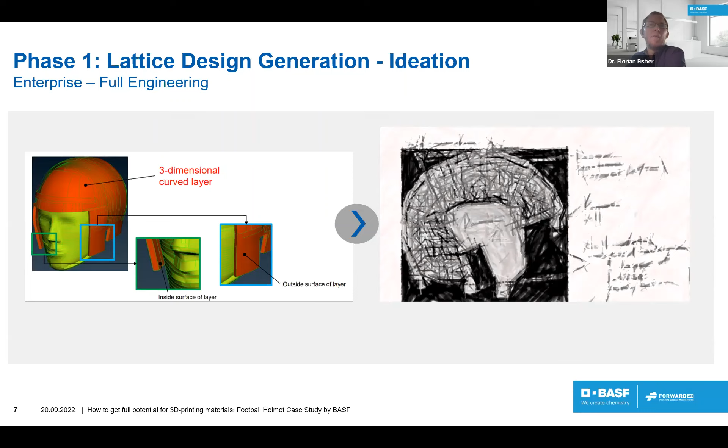And with this idea, we went forward, started to look into what kind of lattices could we use, what kind of unit cells can we use to have optimum performance. And I think this is something a lot of people became aware of over the last 3 years, but 3 years ago, this was really one of the first studies.

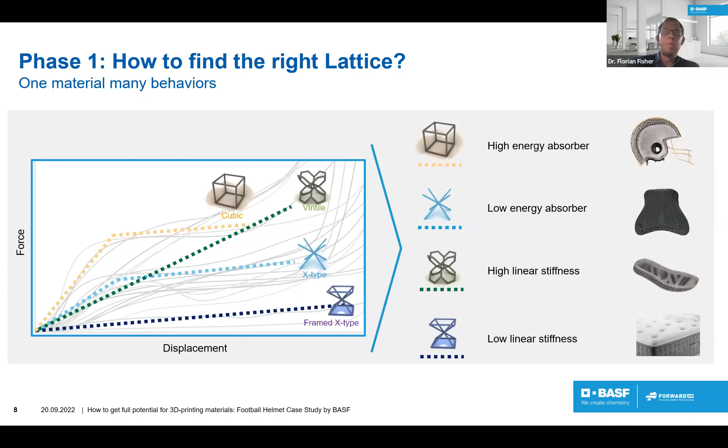And if you want to start with simulation, well, you first need a material model. And this was something we were working on already, especially for the flexible materials, with our BASF colleagues, who have more than 20 years of simulation experience and normally support all the injection molded materials for our customers with a material model so they can simulate those kinds of injection materials. And we wanted to include this part of BASF also into 3D printing.

And then those are transferred to our Ultrasim team and software, which is a software to generate material models out of this data. So we do fitting of this data, optimizing those data so that in the end we have a material model which can be used in typical FEA solvers like an Abaqus or an ANSYS solver, and implemented it then into the typical test the NFL is giving and providing for simulation.

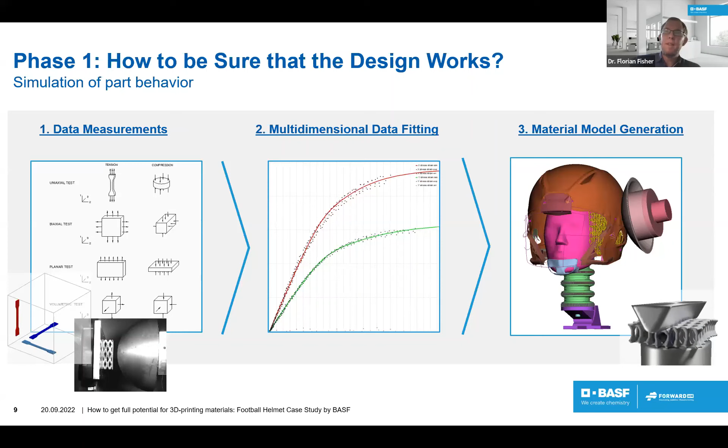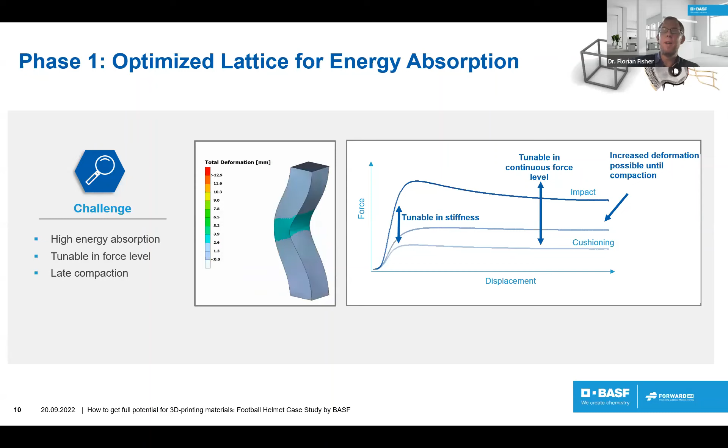And using those kinds of data and models, you can really go one slide further, Marius. You can see here, the challenge was to get a high energy absorption. We wanted to have it tunable in force levels. So depending on where you need it on the helmet, the force which has to be taken in during an impact has to be different, going from just the cushioning, what you feel, to a real impact absorption. And we wanted as late compaction as possible so that you have a huge deformation until the force is transferred to the head.

And using simulation on the single lattice beams, later going to a full unit cell, even later going to real parts of the helmets, we optimized the lattice further and further to fulfill the NFL requirements, always taking into account that we need the lowest weight possible in those kinds of structures. And this was all implemented into the helmet and the first prototype.

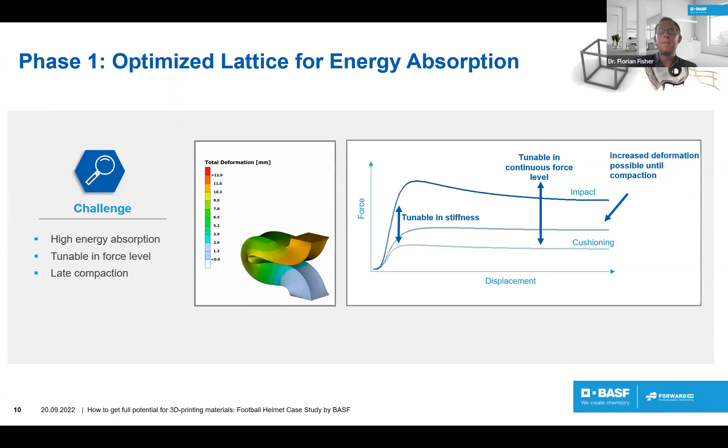And with this, we then in 2021 sent in the first model and had to wait for quite some time to get feedback, because it was quite interesting. The NFL took some time. They measured all the helmets which were sent in and so on. And in the end, they set the highest score which was supposed to be passed for the winner, and none of the applicants passed this really high score the NFL set out as a goal.

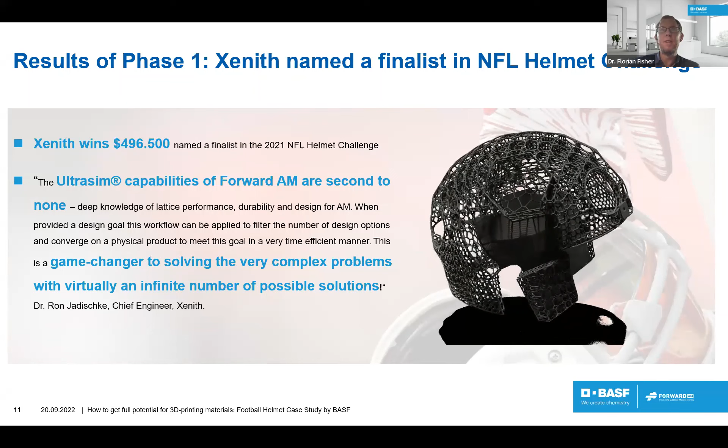And therefore, the NFL decided to name 3 finalists, and Xenith was one of them, and provide all of those finalists with new funding so they could go into the commercialization phase. And so Xenith did win almost $500,000 at this time. And especially proud we have been of the quote Xenith gave us, which you see here: Ultrasim capabilities for AM are second to none. It's a game changer to solving very complex problems virtually with an infinite number of possible solutions.

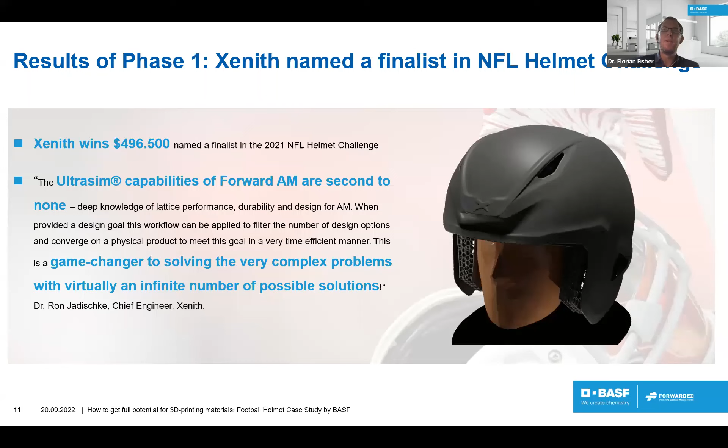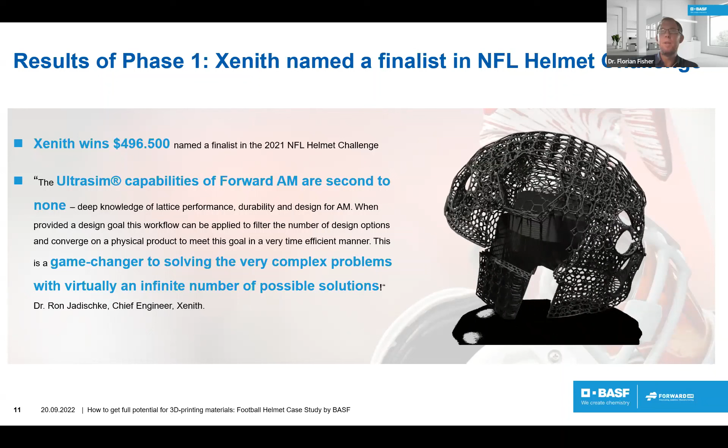And I think this kind of story we played several times with several of our customers, always when it is needed to really fast iterate and find a perfect solution for either a norm or a performance, always taking into account that you have a low weight. Yeah, I hope this gave you a little bit of an insight into how we can use our simulation capabilities to really speed up a project and bring it to the highest performance.

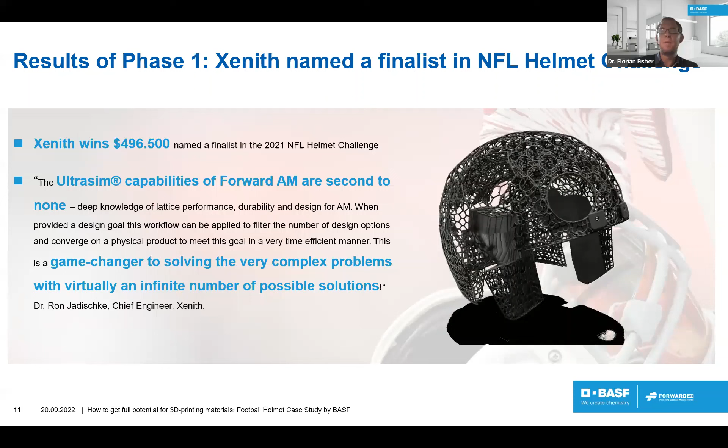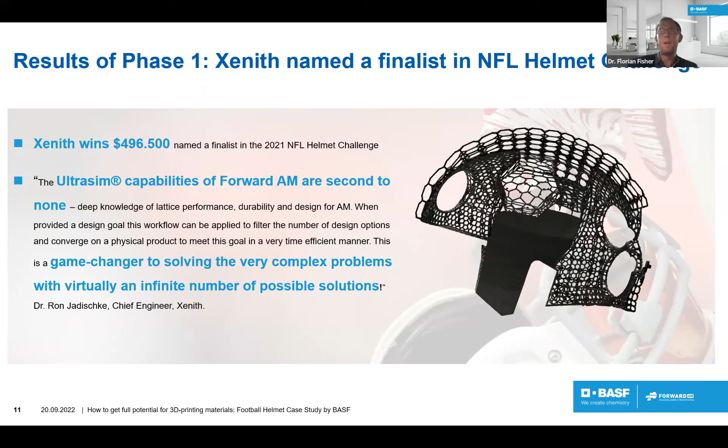And during this project, which took 3 years, we developed a lot of methods which are now more or less ready to use, really automated, so we can go really fast from an input requirement to the final lattice which is needed for a specific application, often in protective gear, but it can also be in footwear, bike seats, and so on. And with this, we finalized the first phase, and I hand back to Marius, who is working a lot on the second phase with Xenith.

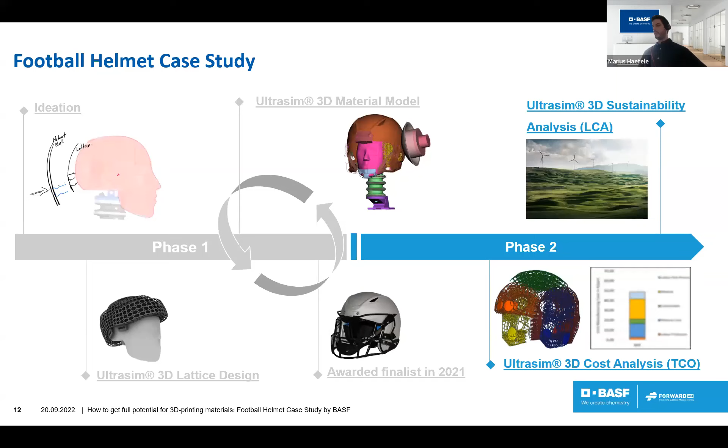Thank you very much. So yes, with the technical solution that we have just seen, we start into the second phase that is more looking at the commercialization, meaning we have to understand the application from a cost perspective, but also from an environmental perspective.

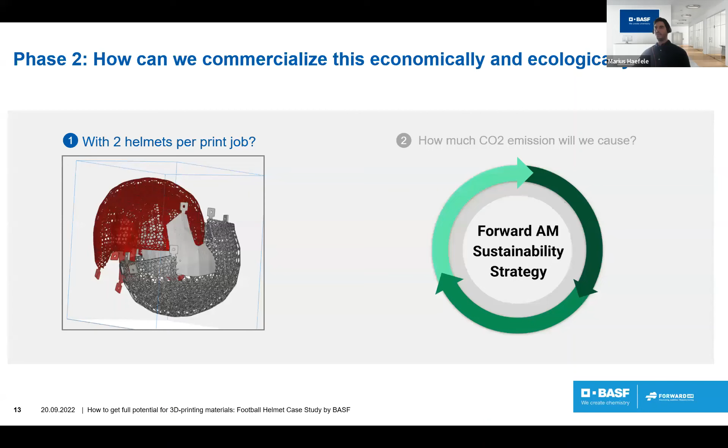And the overall idea here in general was to better understand what are the costs of parts and do we meet the target costs. And you saw the finalized helmet just now, and I put it here on the left side as well. The question was if you actually have a bulky helmet like you see here, and you put it into an HP machine and you have a limited space inside the build unit, and you're trying to nest it, no matter how you turn it, no matter how you rotate it, the maximum number of parts you can nest within one build job is 2. So we start with 2 helmets per job.

And if you now look into the cost per part and you look into what an overall print job of an HP machine costs, you quickly understand that you have a lot of material that is not used. You have a lot of printing time that is basically used only for 2 parts. So the overall costs are simply too high. It's too expensive in this current version.

Now, we also understand what are the target costs, because those are typically given in such a project in the very beginning. So the customer has some kind of idea of where they want to go. And looking at where we're starting here with 2 helmets, we quickly understood that we have to actually do some more ideation phases to drive down the costs in order to meet the target at around 9 helmets per job and around 80%.

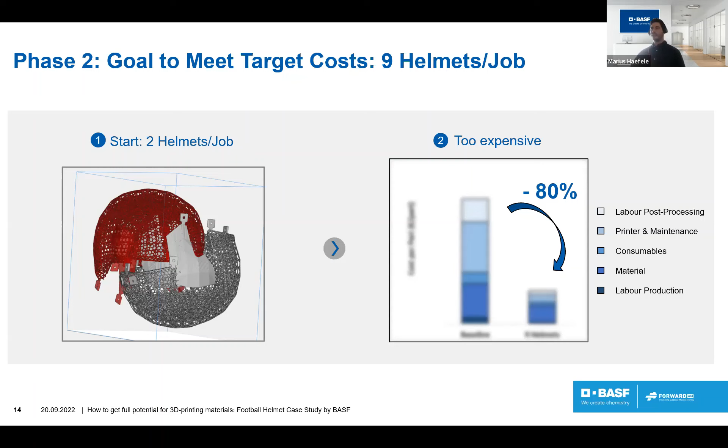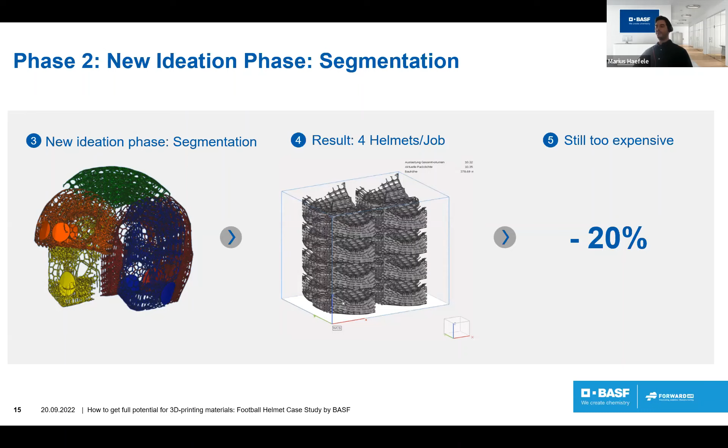This drives down the machine costs, and you use more of the overall material, driving down the material cost per part. So you see with the new segmentation, instead of 2 helmets per job, we now have 4 helmets per job. This essentially reduces the overall cost by 20%. But looking at the target cost, we see that we're still too expensive, so we have to continue working on it.

Now, because this is a project that is not going into serious production today or tomorrow, we also have to take into account the future market developments. So this means we have to look at what is the impact of these market developments on the cost per part within the next 3 years. And there are technical assumptions to take into account, and there are business assumptions to take into account.

On the technical side, you will have somewhat of a higher refresh rate for the TPU01 that essentially reduces the material cost. You have more efficient printing modes that will be able to print faster, that don't take as much printing time, which means that you can drive down the machine costs of the overall parts. On the business side, of course, in future with higher production volumes, you will also have lower prices for material, as well as lower prices of hardware.

And taking these assumptions into account, you have overall, together with the segmentation, a cost reduction of around 50%, which, again, looking at the target cost, is still too expensive, which means that we had to go into a second ideation phase. And this is what I call the armadillo solution.

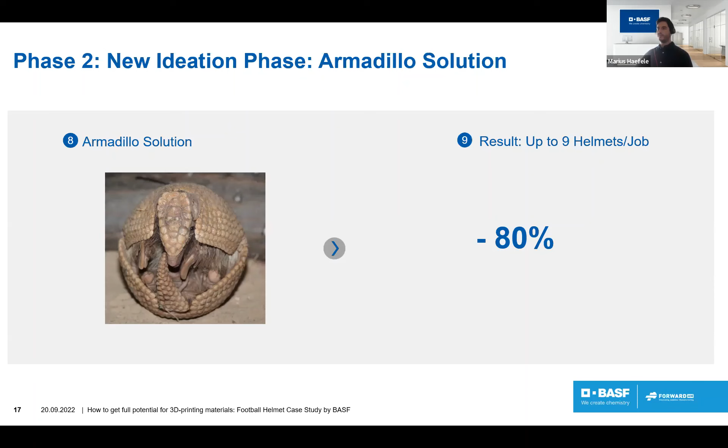Now, going away from the cost perspective, we also want to look at the sustainability perspective.

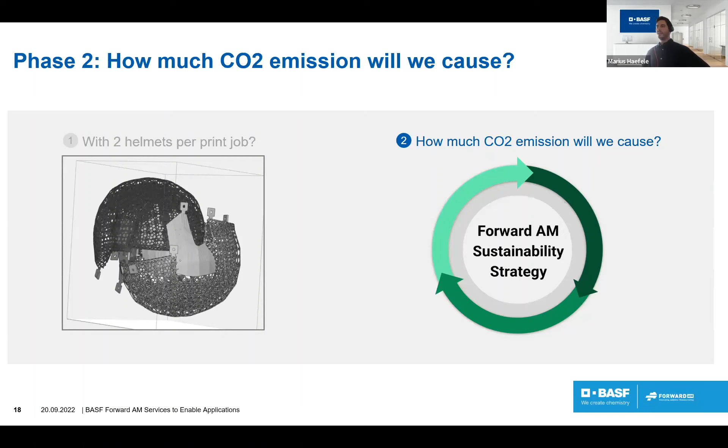And from a sustainability point of view, it's very important to understand, when developing and producing a part like this, any kind of 3D printing application, what is the CO2 emission that we will cause. And this is something that is very close to our hearts. This is something that we within BASF Forward continuously drive forward, to really understand the full CO2 impact, but also the overall environmental impact of our materials and the parts on the environment.

And it's a quite lengthy process, because in the very beginning, first of all, you have to measure. You have to measure to provide transparency and information. You have to understand what are the different inputs in order to produce a material, what is the machinery, what is the electricity, what are consumables, all the different raw materials. And you have to put this together to run life cycle analysis to understand what is the overall footprint.

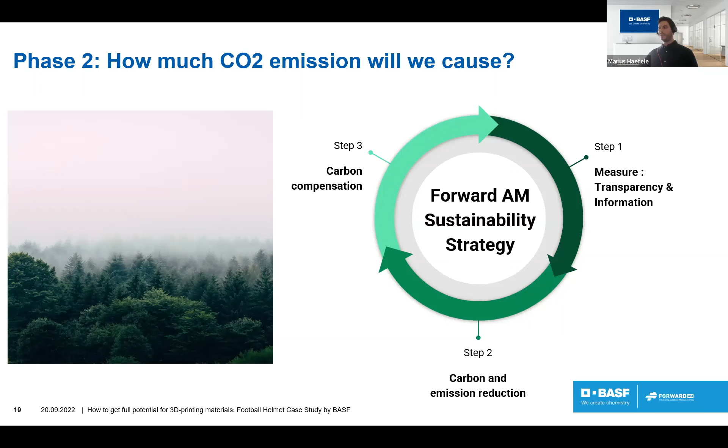In the second step, now you understand where the carbon footprint is, and you can actually reduce it or deploy measures in order to bring it down. And in the third step, it's the carbon compensation. So there will always be some leftover that can be compensated by carbon compensation projects or activities in order to help the environment. And this is something where we are going next, also with Zenith as a next step.

You have, of course, a lot of energy going in there. You have steel for the machinery. You have waste that is being produced. So you check really for all the inputs and the outputs. You look at the post-processing, meaning you have depowdering, blasting material. You have maybe some kind of vapor smoothing, solvent. You have a coating, and then you typically have a use phase. And in the end, the part has to be treated.

So either it can be completely mechanically recycled, or it has to be incinerated, or in worst case, it's going to be landfilled. And this is representing a very generic life cycle assessment. This is something that we do internally, and want to also do more and more externally to provide this kind of service and more transparency about the carbon footprint and the overall environmental impact.

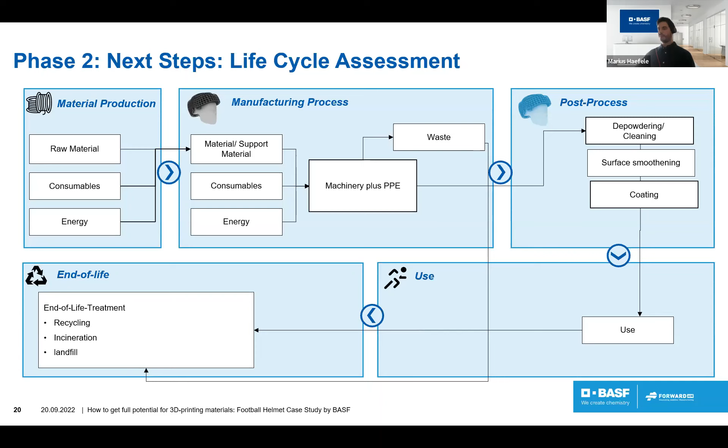So summing up, we started in the very beginning with why it is important to develop these protective gears. We presented that all the way back in the 1890s, football players did not use any kind of helmets, any kind of protective gear. We started with Joseph Reeves in 1893, who first introduced the helmet by asking his shoemaker after a severe injury. And we went all the way to the 1950s with this hard plastic helmet, going to the complete evolution of the helmets.

And we showed you the different lattice designs, where we developed a new lattice that really absorbs the energy that is laid out for the performance, together with guaranteeing that the design works with the material data and model, and also on the commercial side with the cost analysis, and in future also with the sustainability analysis, developing the next generation of football helmets.